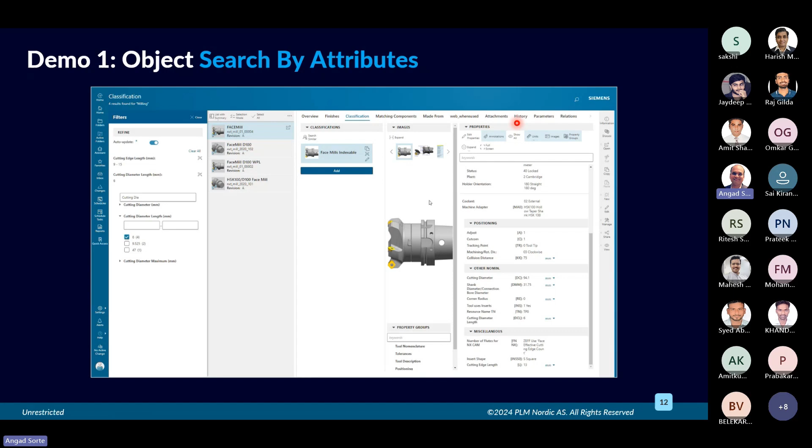Maybe Jaideep will talk about the video and the functionality. Yes, sure. So we have seen the classification capabilities - this demo is regarding that. Here we will see how to use the navigation panel and visual navigation for browsing any hierarchy. As you can see, all the hierarchies are visible, and we are navigating through it as per our requirement, from which we will select our desired class to find the classified object.

Here we are selecting the milling tool out of the tool class, and after that you can see in the middle panel all the milling related tools are available. Further on we will apply the filtering criteria based on various attributes. First, as you can see on screen, we are applying the cutting edge filter criteria. Then later we will apply an additional filter, the cutting diameter length.

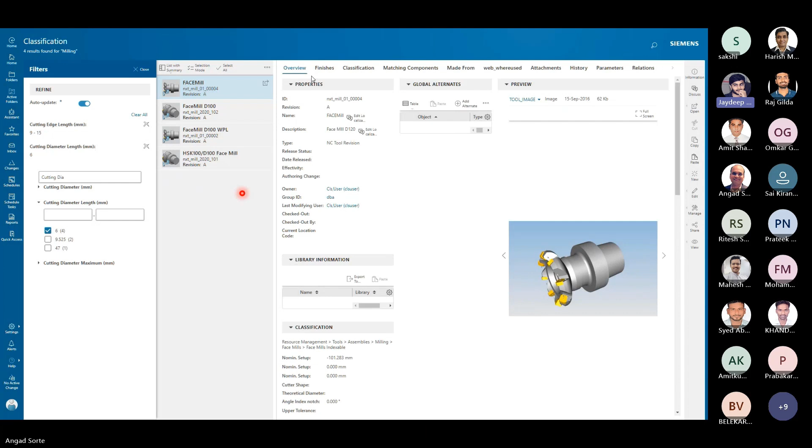So it will further sort out the component and reduce the number of filtered parts. Now you can see the parts are limited to 4, and you can see the part details in the classification panel, and we can see the various images and sheets related to that object, and we can compare all 4 objects to get the proper decision according to our business requirements.

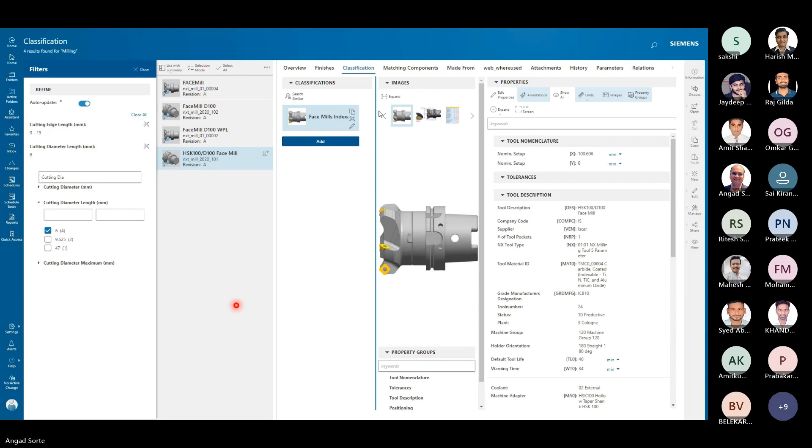So based on our filter criteria, you can see all 4 parts are visible and compared on the screen. We have compared with the length and cutting edge diameter. So these are the various images, data sheets, and drawings attached to the particular classified objects. Basically, classification covers all the information related to the product. So these are some of the capabilities of the classification.

If you want to go to a particular property group, you can do so and see the details as shown in the screen. And at any point you can also modify those details, which we will see in the upcoming demos as well.

So that's it in this demo.

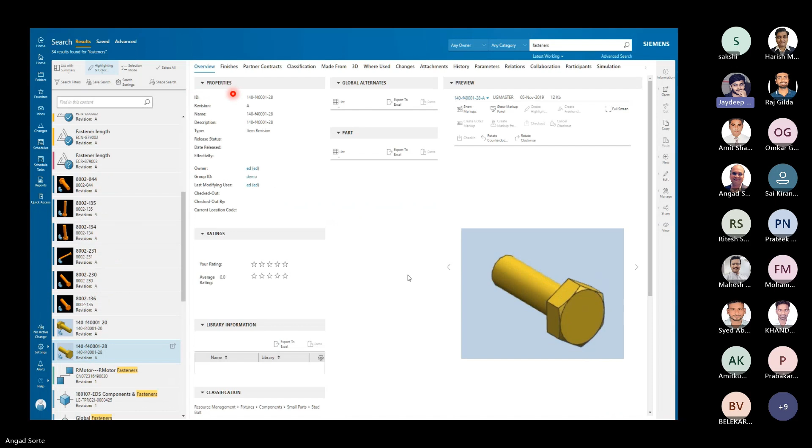Now we will look into one of the demos regarding property comparisons associated with the classified object. We will find any desired component using the search functionality, using the Geolus shape search functionality, which is one of the efficient tools for finding the desired object.

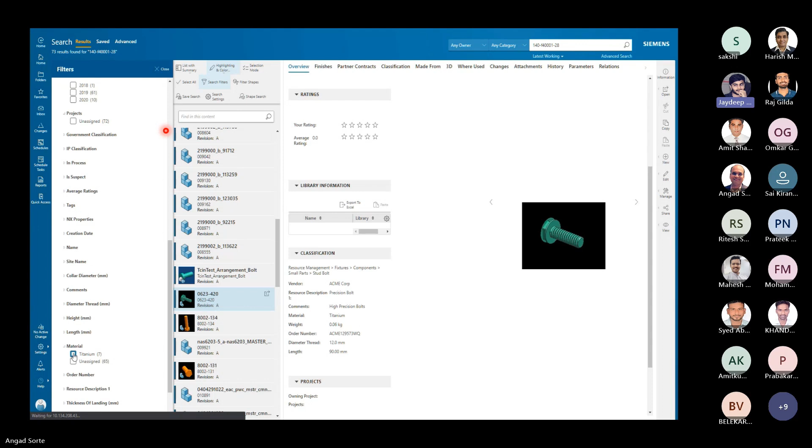You can see on the screen we are setting our shape search criteria, and based on that, classification will limit the number of objects. Above the shape search functionality, you can apply filter criteria based on the attribute, just like we saw in the previous demo. So we are applying the length filter, and based on that filter, the number of objects will be limited.

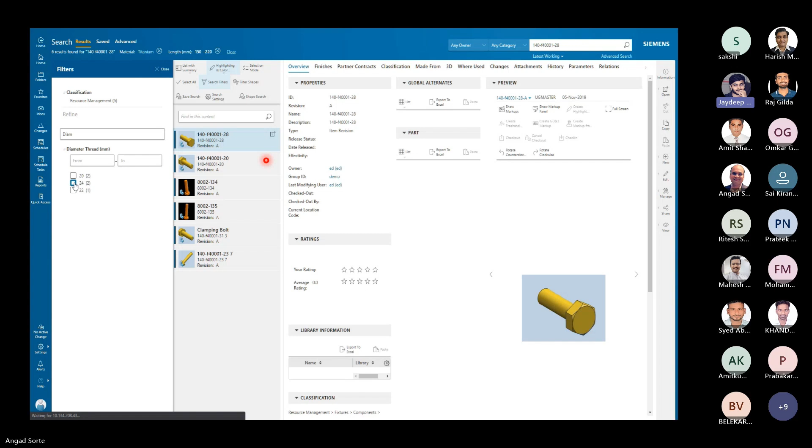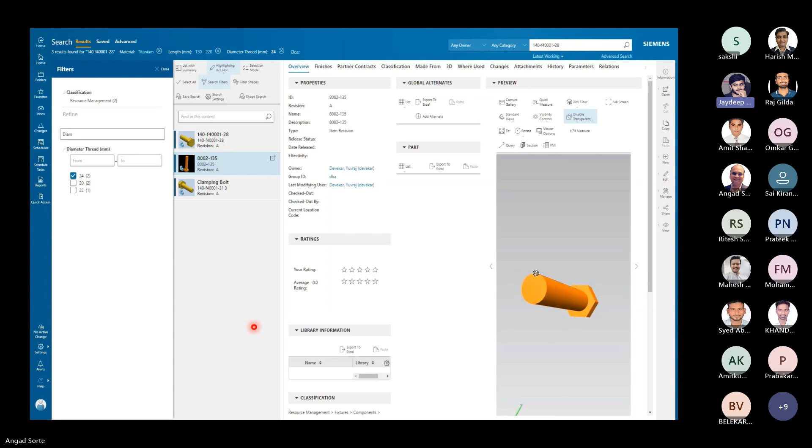And again, if you want to apply one more filter or change it, that is as per your requirement, you can apply a filter. Once the filter is applied, just like the previous demo, we can again compare the objects. So here we have compared the objects based on their material and length parameters. This is how the Geolus search shape engine works.

Right, now continue Angad. Yeah, so just to recap, in the last video what we did is we started with a part and did a shape search on the part. We found all the bolts from this same shape. Then we applied material as a filter to filter it more, then we applied length as a filter to filter it further. And then we came to a certain number of parts to compare, and then we can choose the part. So that is another way to go forward, right?

Right, so this was about how we do shape search and reuse. Going on to advanced classification - what is advanced classification versus basic? We can say it's a new versus old classification engine, like rich client versus active workspace, or MPP versus easy plan. The technology base is new, more active workspace based, and it's more efficient, more scalable, more flexible. The data formats have changed, and more limitations are removed.

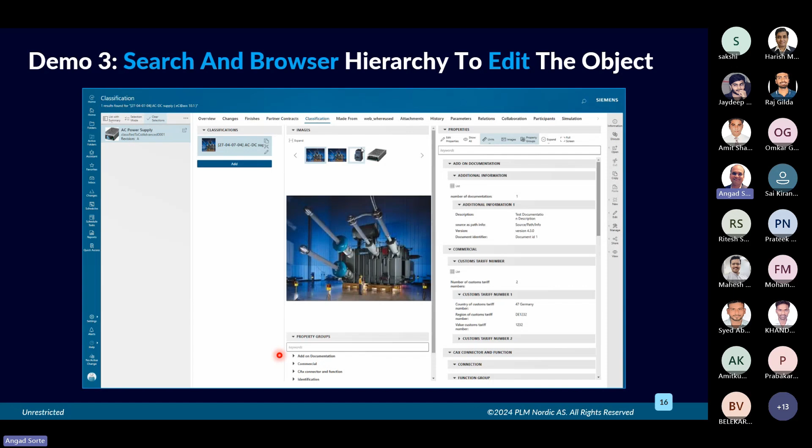And we can see a little bit more about E-class in advanced classification or the new classification. That's a demo where we also navigate and show you how E-class library imported into Teamcenter looks like and how you can use it. Over to you, Jaydeep.

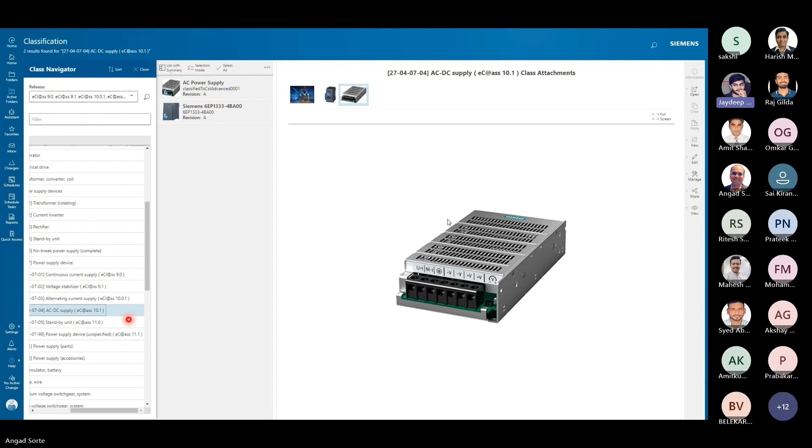So in this demo, we will browse and navigate through the E-class hierarchy. As you can see in the first panel, we are going through the E-class hierarchy, selecting the desired class. According to the selection, it will show the number of objects classified in a particular class or group, visible in the right side panel. Now from that, we will go through the required object and it will show all the related properties to that particular class or selected object.

Now, if you see in the classification tab, it is showing all the properties related to the AC power supply object. And moreover, we are applying some filtering criteria, so that panel is also visible in the left side. So if needed, you can apply filter criteria.

I think Angad's video is paused. Could you check this? Yes, okay, now it's playing.

So you can see E-class functionality provides all product related information. Based on your requirement, you can apply various filter criteria. And according to that, it will show the various property groups associated with that particular object. And if you want, you can edit a particular property group and edit the value as per your requirement.

So as you can see on the screen, we are going through the different property groups, and according to that property group, it shows various properties, and if you need, you can edit that. This is what E-class functionality provides. And moreover, in the E-class functionality, you can maintain various versions of the same component. Let's move to the next slide.

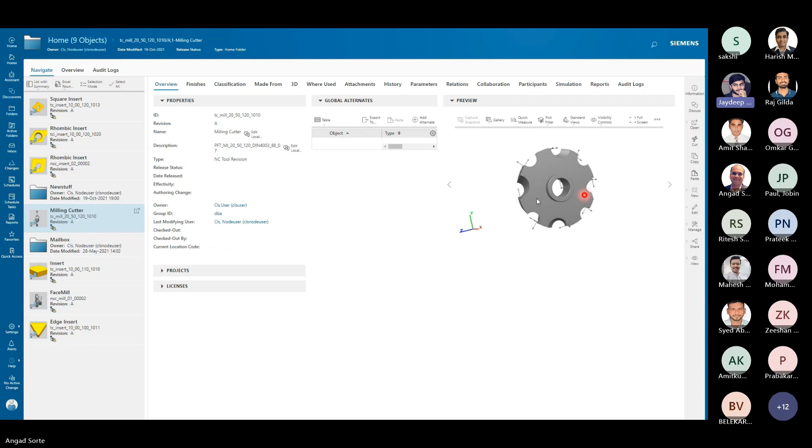So in this video, we will use the functionality of AI. As you can see, we are selecting one of the objects, a milling cutter, and you can see the geometry of that object. After that, we will go for selection of a similar kind of object, which is basically a face mill, and this geometry is more or less matching to the milling cutter. So how can AI help in this? We will see that functionality.

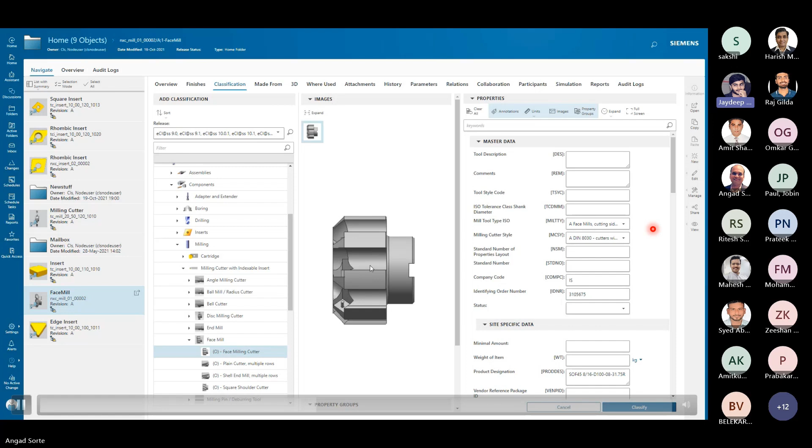So basically what we will do, we will go to the classification, and as you can see, this face mill component is not classified. So if you go to classification, then using the AI and shape search functionality, it will show the best possible matches. So as you can see on the screen, we got 84% match and 12%. So we are going for 84% match, which is more.

And for that selected class or hierarchy, we'll get the different attributes. So as per our requirement, we will modify the particular property group values that we want to assign to our selected face mill component, and we will fill the required values. As you can see, we are filling the values.

You can see it also shows the suggested values which can be applied to that particular attribute from the list. Once all the values have been filled, then we can classify that component, and that component will go to that matching component hierarchy. So the object has been classified to that particular class. As you can see, it is classified under face milling cutter, which was selected in the start. So it is classified under the same class.

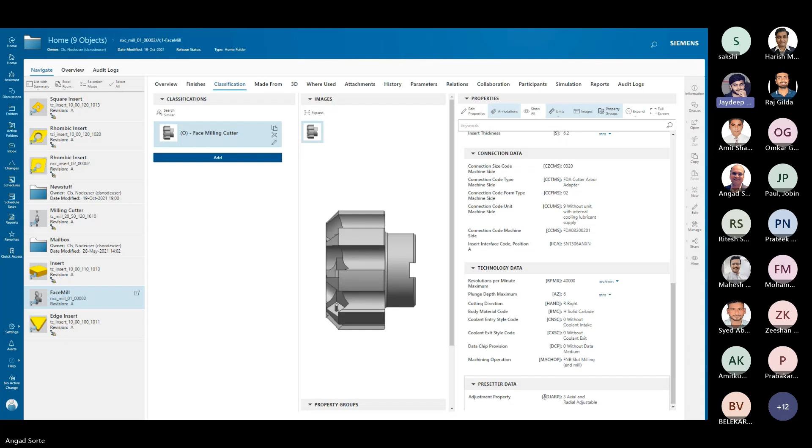So this is how AI helps you. Also, AI has the functionality of auto classification. If you do want to classify a very large number of objects, we can set the probability of the matching criteria.

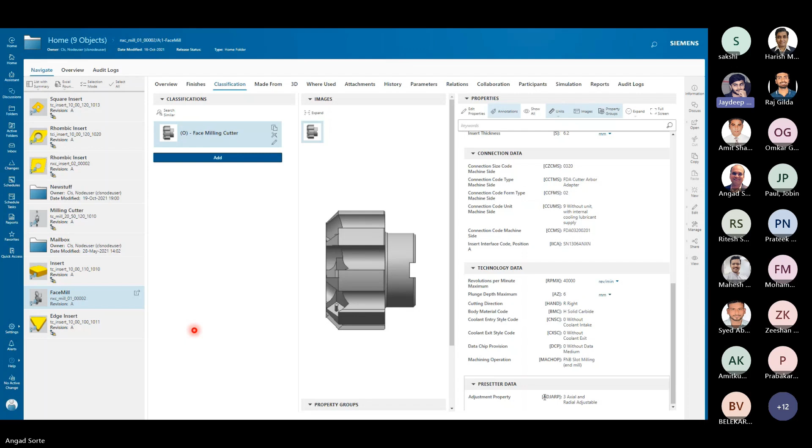Let's say I want to classify all the objects in a particular group with 95% match. So I can put it at overnight. It will find all the matching objects with reference to particular criteria. And once we find all the objects using AI, then we have to take the decision whether we want to classify or not. So this is how AI helps in auto classification as well.

So this was regarding AI. That's it. Thanks, Jaydeep. So then we move on to some practical case studies. So theory is over, and let's see some examples of the implementation.

And yeah, then the usual practice is to start on a smaller area and do the UAT, improve on it, and repeat the cycle, right? So anything to add, Jaydeep, on this?

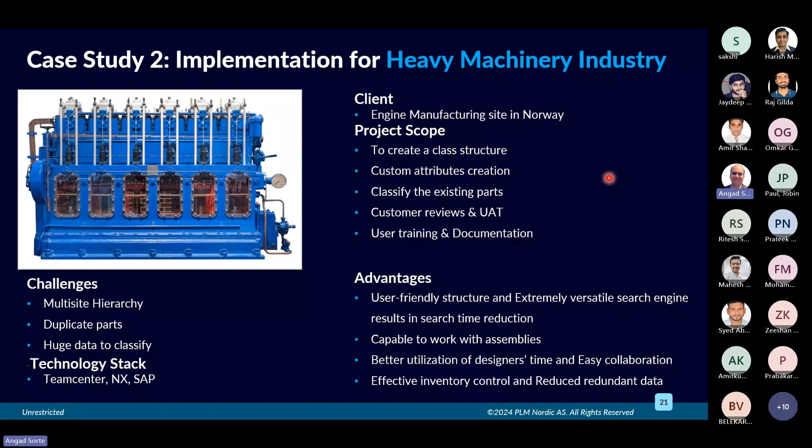Angad, we have already received three questions in the Q&A section. Let's go through them one by one. The first question is: what if we want some attributes which should be only visible to the admin person, not to other users? How can we handle this case?

Yes, Amit. So this kind of functionality is already available in the classification admin application, where you select the required attributes that need to be hidden from particular users. So that won't be visible to users and only visible to the admin person. I hope that answers your question.

The second question is also from Amit: can we set user or project specific rules? Yes, we can set various kinds of rules in the classification application. It depends what kind of rule you want to set. Not all the rules we want to set are applicable; there are limitations for setting rules. Various revision rules are available in the classification application, so as per our requirement, we can set the rules.

We are talking about visibility of the groups, and that can be done in the classification as well. So a particular class will be visible to a particular group, and we can set custom views as well as per our requirement.